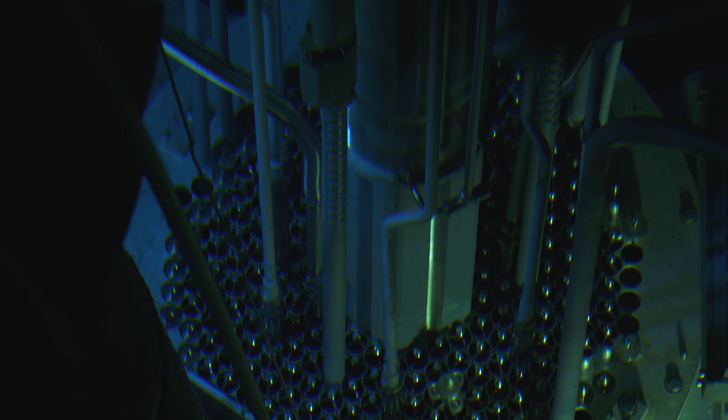Metallurgy has advanced society for millennia. In addition to traditional roles, today, metals are essential to worldwide clean energy demands. That's because many of the proposed clean energy solutions hinge upon our ability to understand and predict how metallic structural components behave over time when subjected to extreme and complex environments, such as harsh temperatures or irradiation.

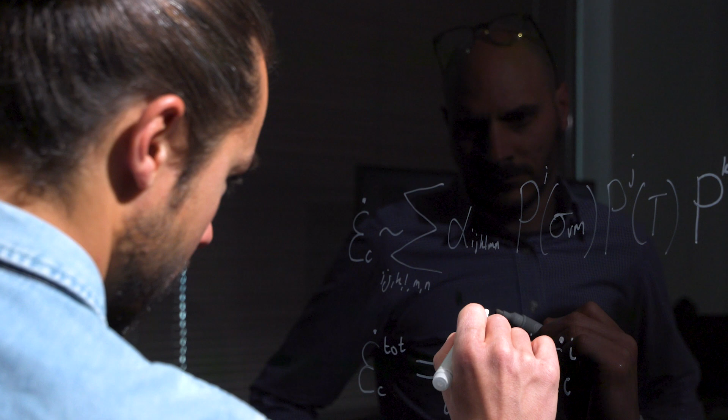The challenge is to anticipate how a metal will respond over its extensive lifetime. As a metal is subjected to mechanical and thermal loads, or stresses, we must ensure subsequent deformation won't result in unfavorable or even catastrophic conditions. By predicting a material's response through theoretical deduction, rather than solely relying on direct observation, we can help mitigate problems and accelerate technology deployment. Everything around us has internal microstructures, visible only with a microscope.

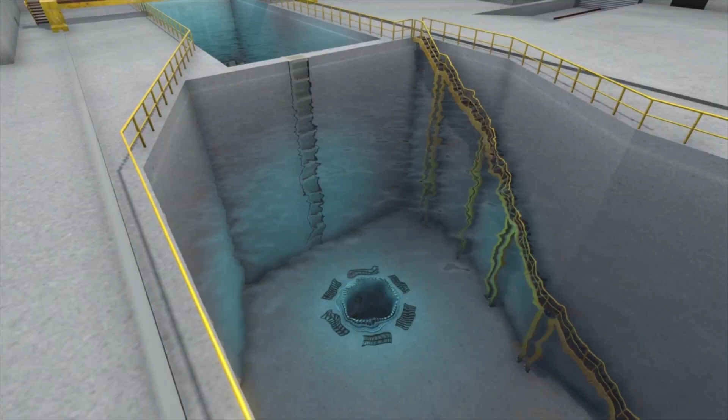Engineered structures, from bridges to nuclear reactors, inevitably have small changes in fabrication parameters that can result in unseen changes in microstructure. Individual components might look identical, but risk varies once you take the microstructure into consideration, and that risk might not be realized until many years later.

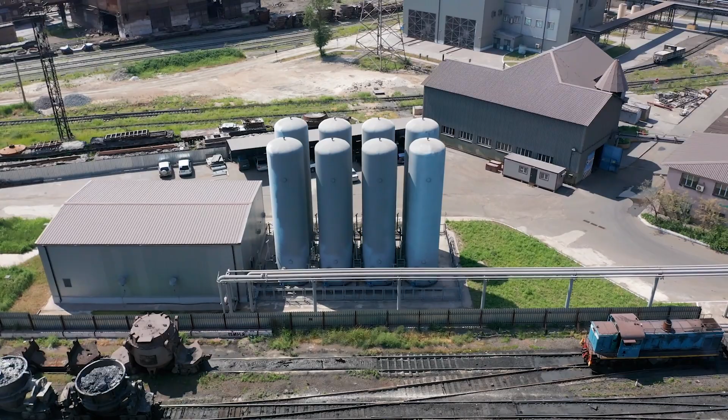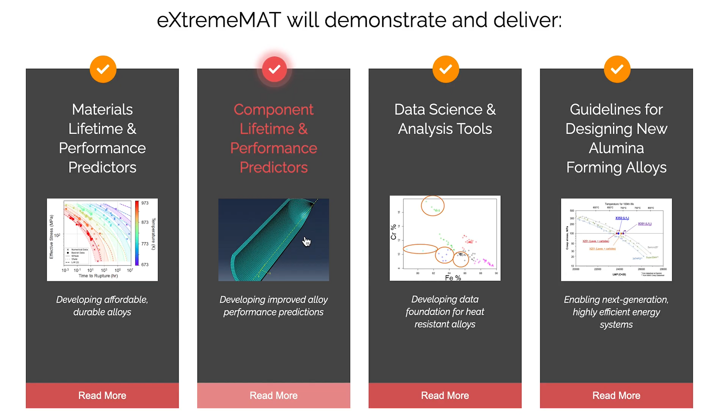Given the pressing needs for rapid technology deployment, tools are needed that give designers, regulators, and the public confidence in clean energy technologies. Fortunately, advanced mechanistic and microstructure-sensitive models provide a pathway to simulate the expected performance of a structural metallic component.

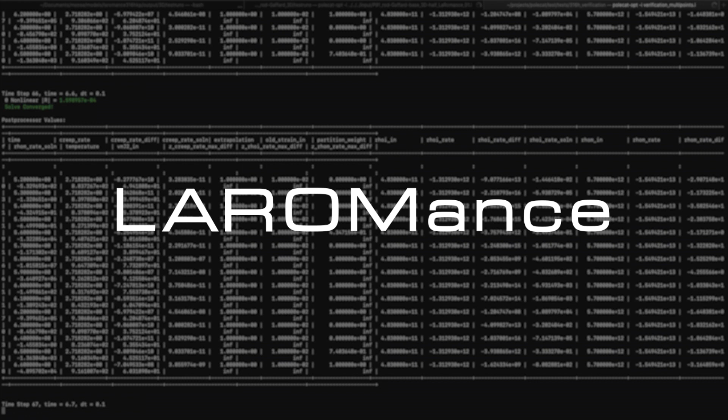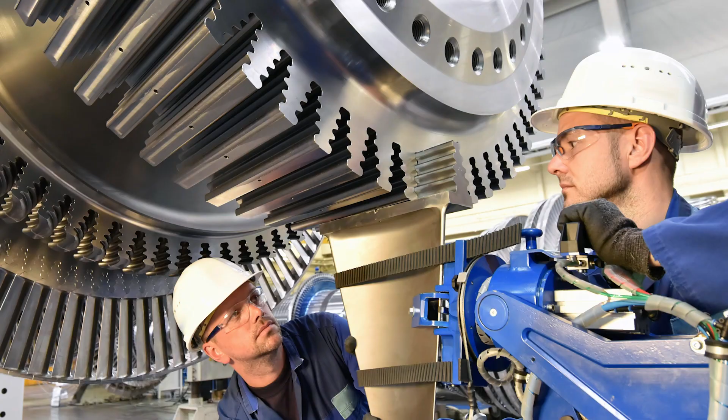Los Alamos Reduced Order Model for Advanced Nonlinear Equations, or LAROMance, was developed to relate these microstructure scale states to the performance of large-scale structure, thus offering much-needed peace of mind. The suite of data-driven models predict the mechanical response of structural engineering metals subjected to extreme environments, such as those in nuclear power plants or turbines.

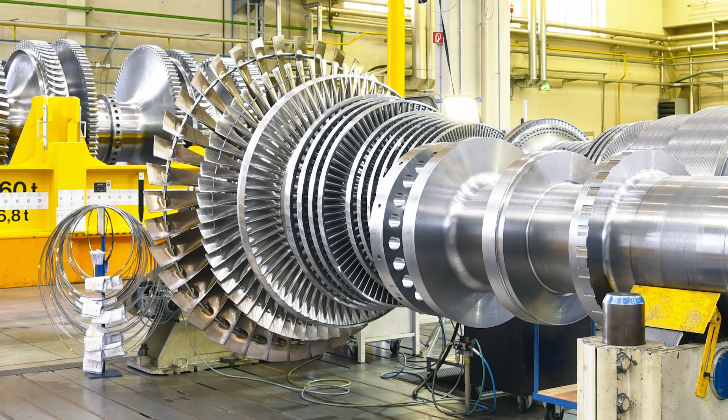These models fully integrate into finite element solvers to help us simulate the response of engineering structures down to the microstructure of the base metal. Usually, a series of laboratory tests are performed to establish the expected lifetime of a material system. However, the testing can take more than a decade, and the actual conditions experienced by a material in use might differ from those in the laboratory tests. An ideal model should be able to extrapolate beyond the data available.

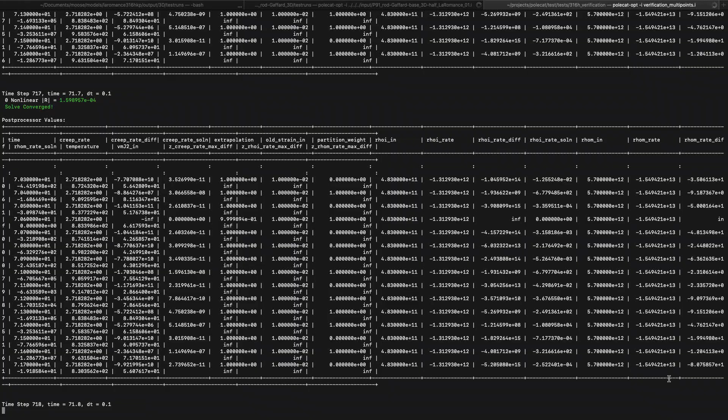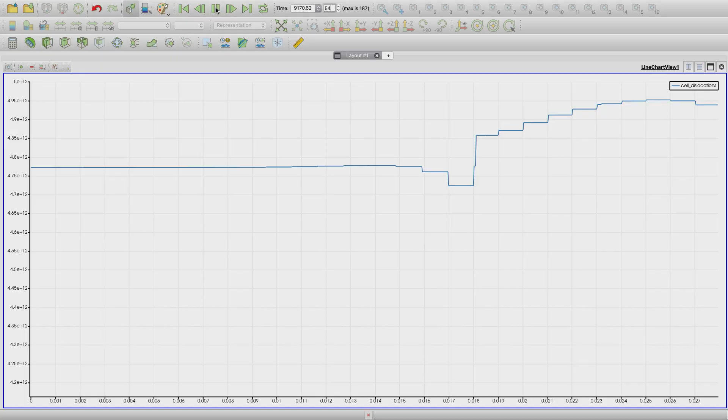LAROMance models draw from a database of advanced simulations that are sensitive to the microstructure of metals. Our models can be applied to any arbitrary quasi-static loading condition, such as stress relaxation, creep, tensile test, and cyclic tests. LAROMance captures the entire spectrum of behaviors of the metal in a unified fashion. This development really opens new avenues to incorporate microstructural information into real-world decision-making.

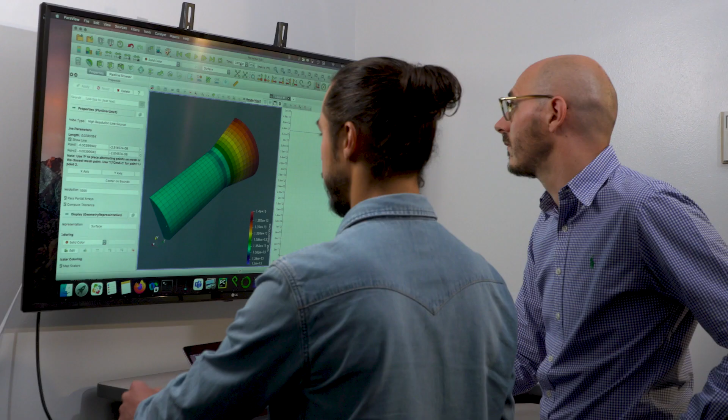For example, the ability to predict a material's response well into the future provides a solid pathway to accelerate deployment of nuclear reactor components, which must perform flawlessly while subjected to truly extreme conditions. LAROMance introduces highly predictive tools as a turnkey solution to any user, regardless of their expertise in material science, all while reducing cost, increasing safety, and expediting deployment.